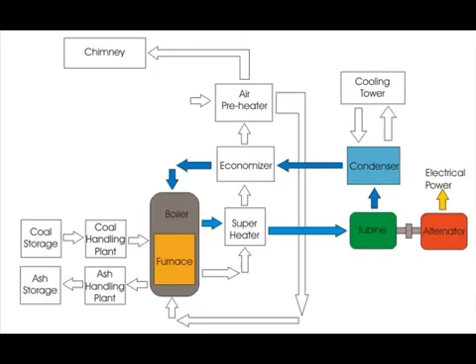These power stations have some advantages, due to which thermal power plants are the most conventional plant for producing electrical power. Number 1, the fuel is coal, and coal is quite cheap in price. Number 2, it involves lesser initial and capital cost compared to hydro and nuclear power plants. Number 3, it involves less space compared to hydro power plant.

But in addition to these, thermal power plants have two major disadvantages. Number 1, it pollutes the atmosphere much due to release of large amounts of smoke and fumes. Number 2, its running cost is higher than hydro power plant.

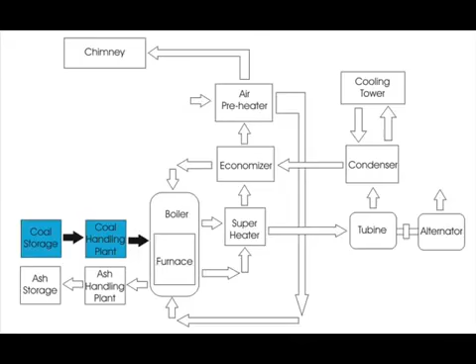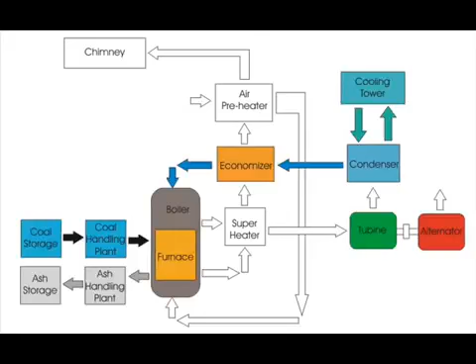This power station mainly involves 7 major arrangements: 1. Coal handling plant. 2. Steam generating plant. 3. Steam turbine. 4. Alternator. 5. Water feeding arrangement. 6. Cooling arrangement. And lastly, the ash handling arrangement. Let us discuss these points in brief, one by one.

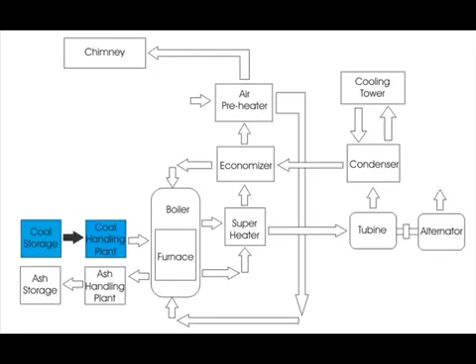The coal is first transported to the power plant, then stored in the coal storage plant. From the coal storage plant, coal is delivered to the coal handling plant, where it is first pulverized. Pulverization is required because it increases the thermal efficiency of the coal. This pulverized coal is then fed to the boiler furnace by belt conveyors. The coal is burnt in the furnace and produces sufficient heat.

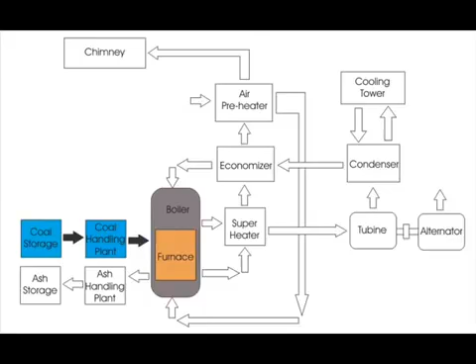Now come to the steam generating plant. The heat produced in the furnace is utilized to convert water into steam in the boiler. The flue gases from the furnace make their journey through the superheater, economizer, and air preheater, and are finally exhausted to the atmosphere through the chimney. The steam produced in the boiler is not fully dried.

That is why it has to pass through a superheater, where the steam becomes fully dry and superheated much above the boiling temperature of water by the flue gases on their way to the chimney. The superheated steam is then delivered to the turbine.

After passing through the superheater, the flue gas still has some heat energy in it. Some portion of this remaining heat is utilized to heat up feed water to the boiler. Feed water passes through the economizer before being fed to the boiler, where its temperature is increased by extracting heat from the flue gases.

After extracting heat in the economizer, there is still some remaining heat in the flue gases, which can be further utilized to increase the temperature of air before feeding it to the furnace for coal combustion. This air heating is done in the air preheater by means of flue gases on their way to the chimney.

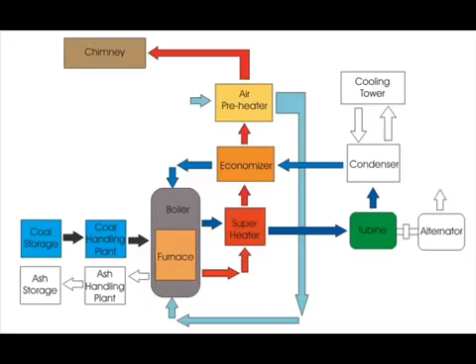The superheated steam is forcefully expanded in the turbine and hits the turbine blades. As a result, the turbine rotates with high speed. The rotor shaft of the alternator rotates by means of this rotating turbine. Generally, the turbine shaft and rotor shaft are coupled together.

After doing its work on the turbine blades, the exhausted steam has to be condensed immediately to give space to the steam behind it. This is done in a steam condenser by means of cold water circulation. The condensate from the condenser is fed to the boiler for a further cycle. During this cycle, some water may be lost, which is compensated by feeding water from an external source.

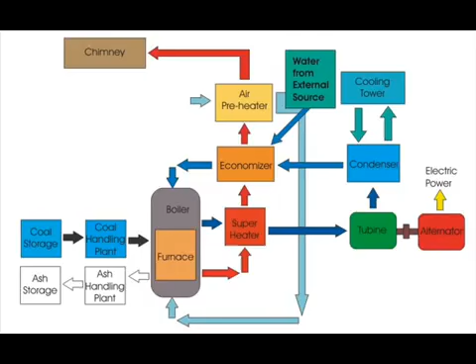The water circulation in the condenser is done by means of water available in natural sources, like rivers, canals, lakes, etc. The coal is burnt in the boiler, and ash is produced after the completion of combustion. The ash is removed to the ash plant, and then delivered to the ash storage plant for disposal.

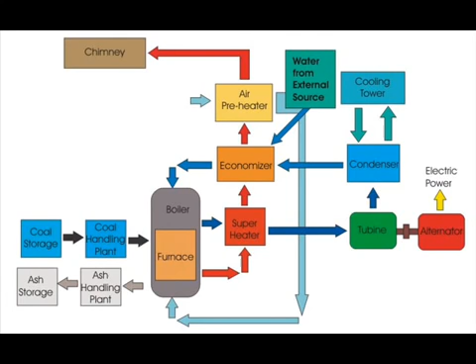That was a basic introduction of the steam power plant.